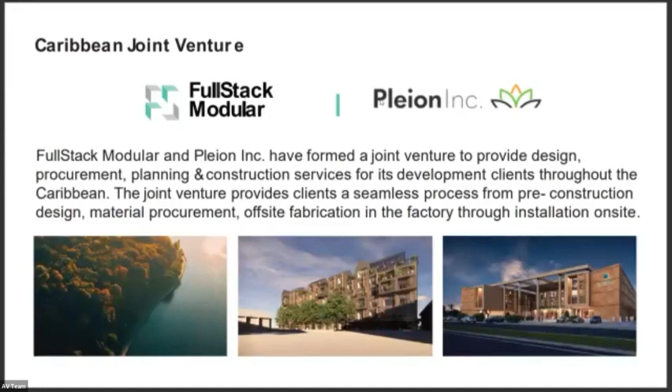We have not just a factory that does the same kind of construction that's done on site, but there are all kinds of technologies, including the technology that we developed at Tech Prefab, which we brought over to FullStack, that FullStack uses in order to enhance the design and the work that's done. There's a lot here, and I'll just point out one that to me was particularly interesting: we have a very high level of what we call dimensional accuracy.

But here I highlight some of the elements that are plaguing conventional construction. I mentioned affordability and housing shortages. There's a shortage of housing in the United States, and there's also a shortage of affordable housing. The numbers are in the millions. And when we think about the rest of the world, it's not just the US that suffers from that. So that's one thing that is demanding a change in the way construction happens.

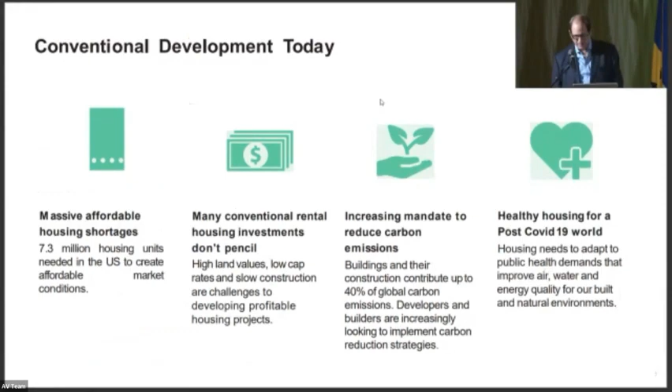What I want to talk about now—actually, I want to go back one slide. There is a slide that almost every modular or prefabricated company shows when they're trying to demonstrate some of the advantages of building in a factory.

So when you're building inside a factory, you can take advantage of the fact that you're not exposed to weather conditions. For example, building in the Northeast of the United States, we have long, cold winters, and that can cause significant delays. That's one advantage. The other advantage highlighted here in this, what I call the famous modular prefab slide, is the serial nature of conventional construction on site—when you're building on site, you can only do one thing at a time.

First, you have to prepare the foundation, and only then can you start building the building itself. That key difference between conventional and modular can save many months off a project. And as we all know, time is money. If you can save many months off a project, there are costs, whether they accrue based on financing, or if you're building something for rent or sale and you can finish 6 months earlier, that means you can start renting or selling it 6 months earlier. At a time when there are a lot of challenges in raising the capital, the equity and debt needed for construction projects, being more efficient in time and schedule has a very big effect on the overall viability of projects.

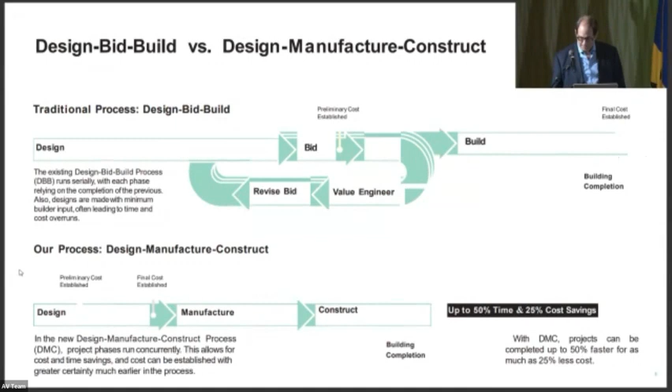I want to further talk about some of the additional advantages that we have. Again, it is a growing industry within the United States, although it's far behind Asia and Europe in terms of the percentage of construction that is built in factory as opposed to on site. It's changing rapidly, and there are a number of companies raising a lot of capital.

We've raised a lot of capital. There are other companies coming into the fore, but we've been doing it for a while, and it's really more on the business side, the finance side, and the project acquisition side. My partners are deeply experienced in building and construction, particularly in modular. There are all kinds of developments I'm going to get into within the way our system is designed that are proprietary and give us a big advantage relative to someone doing conventional construction who decides to open up a factory.

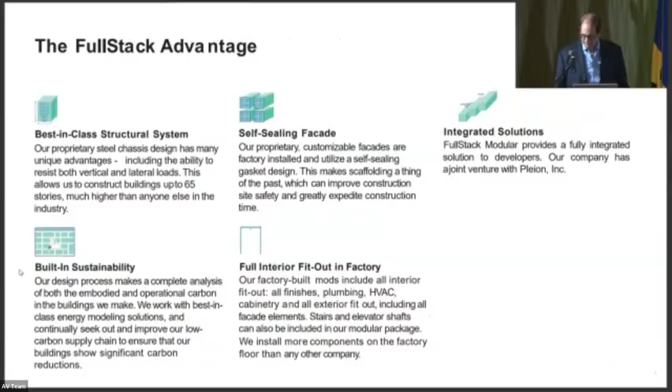We also have a factory in Portland, Oregon. We're working on some West Coast projects there. And one of the many reasons why I'm at this conference is we think that the next place for us to open up a factory would be in the Caribbean.

Here I go into a little bit more detail about the system that we use. If you go back to the example of building a car, on certain car websites like Tesla, there's one chassis that they built for the car, and then you can pick all kinds of options around that chassis. So that's kind of conceptually how FullStack has thought about modular construction. There's a proprietary system for chassis design, and there's flexibility within that, because not everyone is building the same cookie cutter building.

As I mentioned, some of the modules that we do have special circulation modules. There are kitchens, there are bathrooms. We're actually building now, we have a contract with Google. In New York City, Google has bought a lot of office real estate. We're actually building, this is a subcomponent, unisex bathroom modules for Google as a client, which is very interesting.

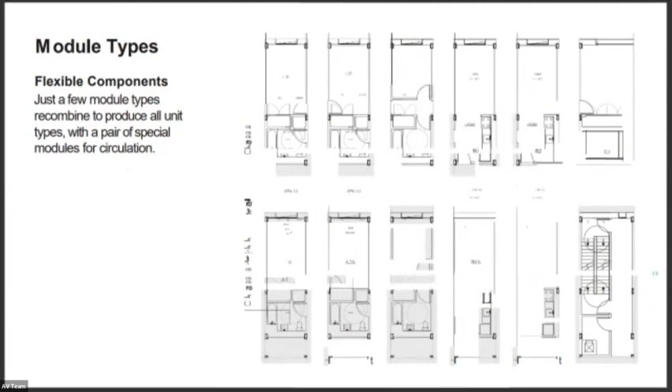Going back to the auto example, the way automobile manufacturing has become so systematized is by breaking everything down to its components. Sometimes the components are built in the same factory as the main factory, other times they're not. If you've ever seen a picture of a production line in an auto manufacturing facility, you see how there's the main chassis that moves along, and then people are either installing components or building components around it. So this is the whole kind of philosophy of thinking here.

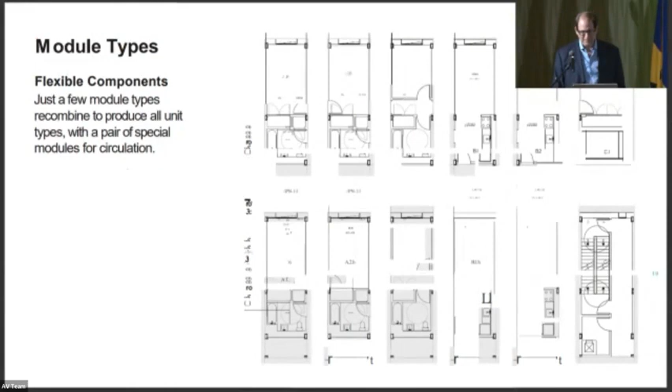So here, we show also that you're not constrained by the fact that your building is modular in terms of both the outer design and the interior design. Now, some of you may know about buildings made out of shipping containers that are not being used anymore. There are lots of containers, and there are aerial photos you can see of them, it looks like a cemetery of containers. So there's an industry where some people are doing that, and in some ways it's a brilliant idea, it's environmental, but what we're doing has nothing to do with that.

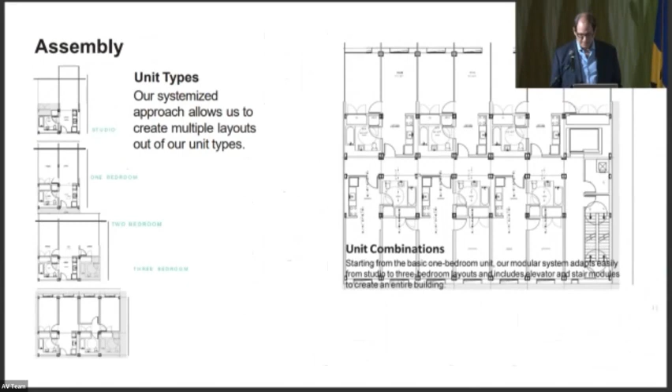The dimensions may look like containers because ultimately they have to be built efficiently in terms of transport, but we're not making anything out of containers, and we're not shipping anything in containers. They ship on their own without the need for containers. The whole idea here is to have sub-assemblies and to have components built, and the components can be specially installed in buildings of various designs, but things that are repeatable should be made in an easy way.

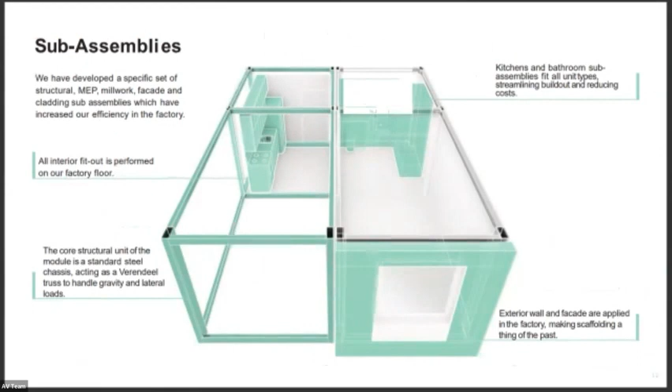I mean, think about just the concept of plug and play. So what we have, again, that's proprietary, is we've developed a set of cladding and facade assemblies which could be put on different types of building chassis. There's a lot more detail around it, but you get the idea.

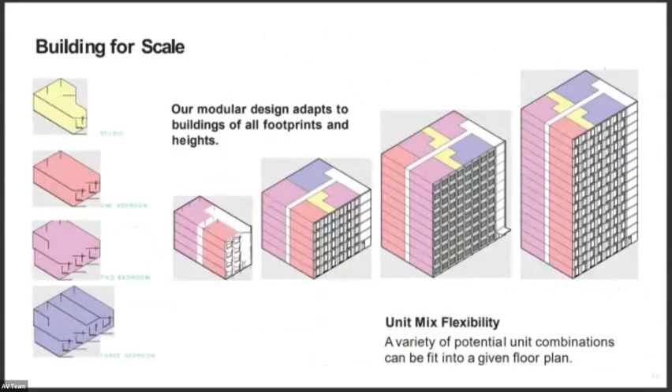Going back to sort of the outer framework of the building, if you're doing a massing study and trying to figure out what the best size and shape is, you should know that with modular, you're not constrained at all. There's a lot of creativity. We have a design for a round building, so you're not necessarily constrained by the fact that the main chassis is a rectangle. There's different elements, different ways to shape it, and a lot of customization within the idea that if you do mass customization, you can gain the efficiencies but still retain creativity around buildings so that not everything looks the same.

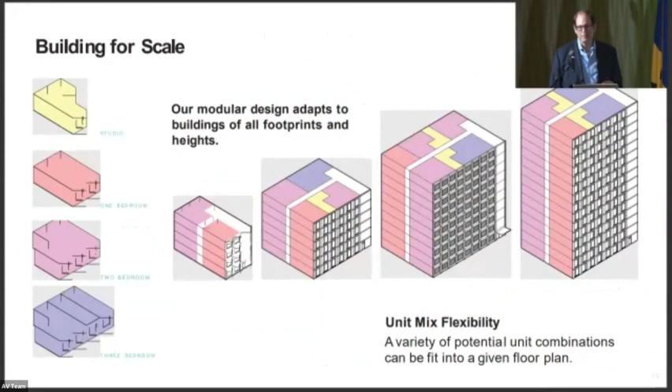On the other hand, if you're building, as I said at the outset, hospitality and multifamily, you do want to retain a certain cookie cutter element and have as much repeatable components as possible. But there's ways to do it so that the building doesn't look cookie cutter. That's something I want to emphasize because people sometimes assume differently about modular construction.

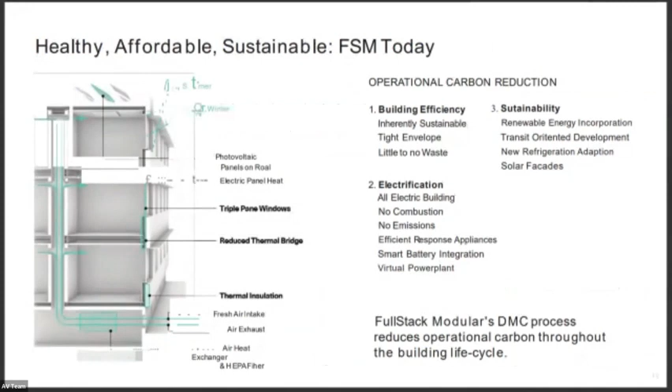When we talk about these issues of affordability, of health, of sustainability, they're all sometimes not connected to the details. And as we know, we have some men of the cloth here, God is in the details. And in real estate development, there are a lot of details.

Not to go through every one of these, but within the general system that we do to build modular construction, there is almost no waste. Now, I know waste is a good thing because you can take the waste and make money out of it, but what we do is try to be a little more preventative and try to prevent waste to begin with, at least in our system. So we will not be a source for Sweden, I think it was Sweden, of importing waste. We will try to do that as little as possible.

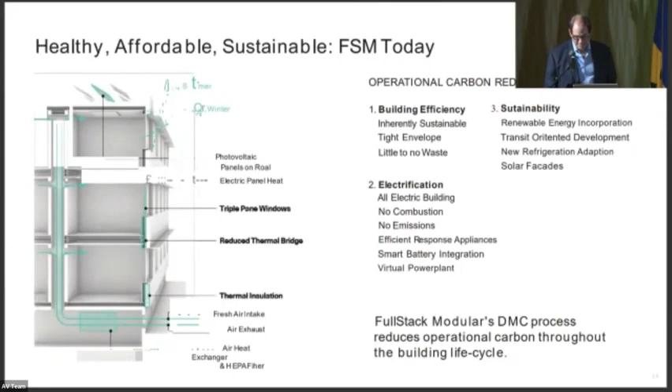There are other things within the construction that make it healthier. We sort of have this first slide, which I call today, and then we have some of the elements that will also add to these three factors: health and affordability, sustainability, that are in the pipeline that we're developing.

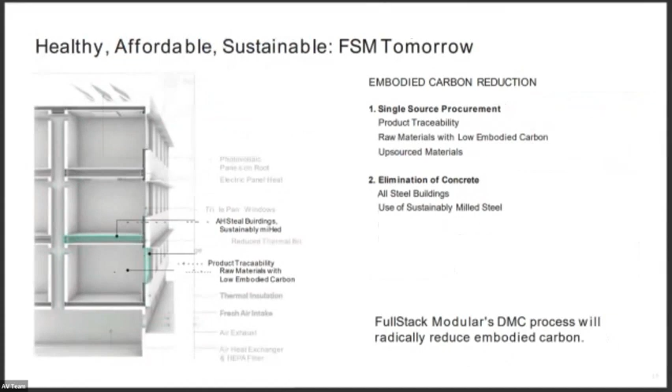So I want to show you a couple of examples of things that we've done and things that we're working on that can give people an idea of what could be done in the Caribbean that might inspire you to think about projects that have potential.

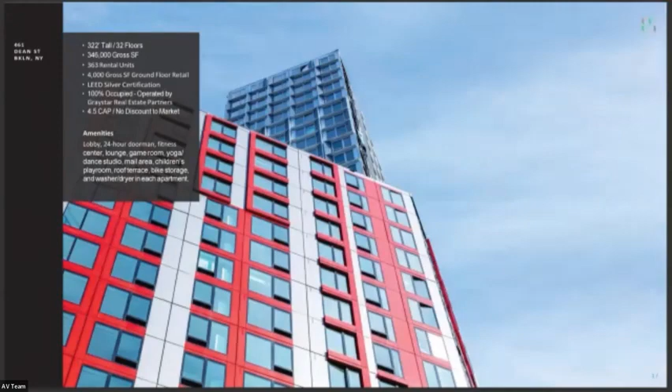So this is the first building that my partners built that got some attention because at the time that they built it in Brooklyn, New York, this was the tallest modular building in the world. It's right next to the Barclays Center, if any of you know Brooklyn, which is a big sports arena. Brooklyn Nets play there. And it's a 32-story building.

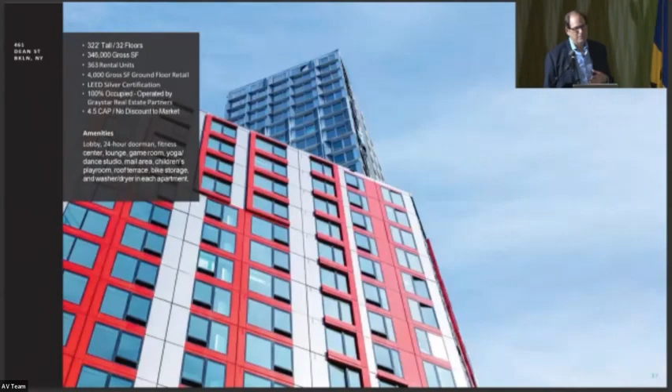You could see that there's some variation in the facade type and the color. The interiors are beautiful, I've walked it. It's lived in now. It's no longer the tallest building in the world. It's now the tallest modular building in North America because I think someone in Singapore built a bigger building. You know, things like that happen. The idea is not to be the tallest, but it's to be the most efficiently built and the most viable project.

But this one happens to be a proof that we can build in this world modularly and we can build tall. And the fact is that from an engineering, a structural engineering perspective, using our system, we can go as high as 65 floors. So hopefully we'll be seeing that one day in a market and location where it's warranted.

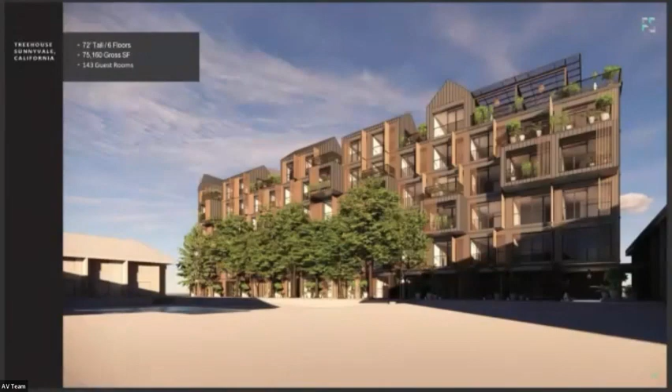The next slide is a building. It's a hotel, the Treehouse brand, which is owned by Starwood Capital, who's our client in this. This is in the planning phase right now, to be built right in the heart of Silicon Valley in Sunnyvale. This project is a 143 guest room hotel. We're building it out of Portland, naturally, from the West Coast facility.

And as you could see when you look at it, and as is true with any well-built modular construction, if you didn't know that it was modular, you wouldn't know, both from the interior and the exterior. There's a lot of flexibility, both in design, as I mentioned earlier, but in the cladding and the outer. If you want to make a building that looks like it's made out of wood or has wooden cladding, all of these things can be done.

And so the Treehouse brand, as you can gather from the name, is one that's environmental, sustainable, back to nature, has a green element to it. So this is the design. We're in a third stage now of design for them. We've just actually this morning I was talking to our CEO, and we got approvals from Starwood on kind of the basic procurement plan. So we're very excited about this one.

We think it's going to bring modular a lot more attention in the United States, which is part of us and even our competitors in the industry. We're trying to really make sure that people understand the benefits of it.

This is another project that's really interesting, one I've had a chance to tell some of you about. This is another hotel we're building out of the New York factory, but it's going to be shipped to Saudi Arabia, to a city called Al Ula, which is a UNESCO heritage site. I know you have one here because I passed it between the airport and the Hilton.

This hotel doesn't look obviously modular. It's a preliminary design, a bit earlier in planning and construction than the one I showed previously in California, but you get the sense that you don't need to be in country X to build a project for country Y. The group building this are very smart developers - this isn't an unlimited pot of gold someone is throwing money at. These are people who surveyed the possibilities of building on site and decided it makes a lot more sense to use our system.

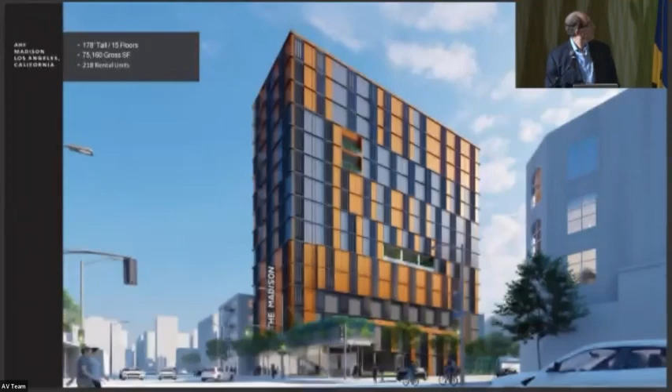So we're pretty excited about this project. Here's another project that's in the planning stage. You can see there's a lot of variation across all these projects when you look at them, and even within a single project there's variety.

Anyone can work with us to figure out and procure the best materials for each project. What makes a project good for modular isn't its outer look - it's not about what you're trying to achieve aesthetically, because we can do anything. It's more about what you're trying to achieve in terms of viability, and that's where we can be most helpful. In terms of the creativity of the building, you have just as much flexibility as you would building on site.

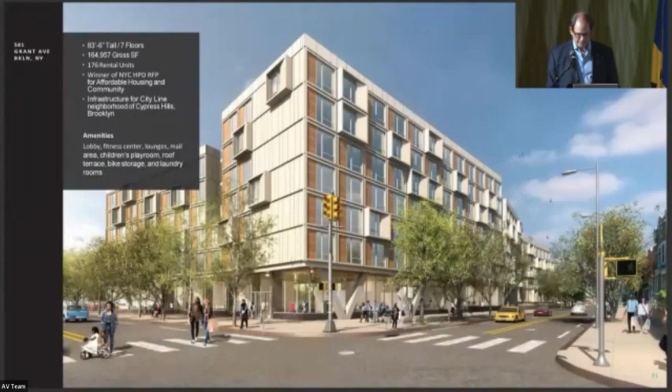It requires people who can't just learn on the job - it is very hard to learn on the job. One of the great things about the team we've assembled - I don't have the management page here, but almost all my colleagues specifically on the construction side have decades of experience in the industry, both on-site and in modular construction, from other projects we've worked on.

So in closing, what I'd say is that we're very interested, as mentioned before, not just in building projects here on behalf of groups in the Caribbean, but the idea of building a factory here means you can build at home, so to speak. You can train a whole new element of a workforce.

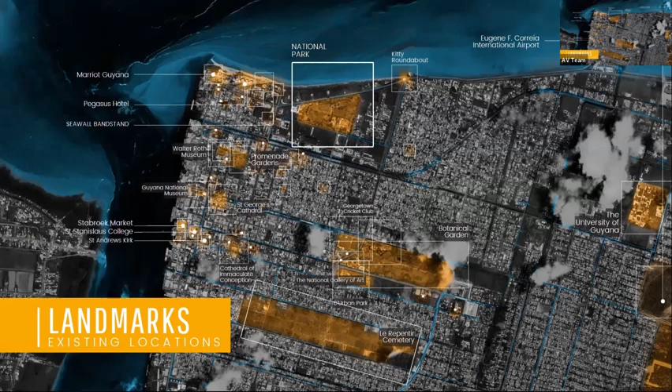There are existing canals that we have to connect, government buildings that we have to connect somehow, public services, private services, landmarks, whether they are gardens, museums, etc. They all have to be connected in a way that makes sense and that people can enjoy those spaces. We propose the creation of green corridors connecting all these landmarks.

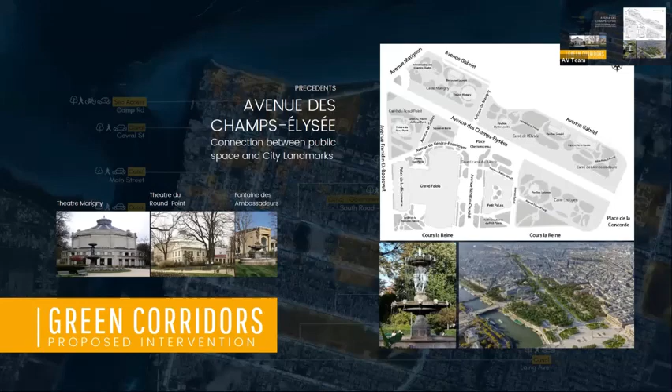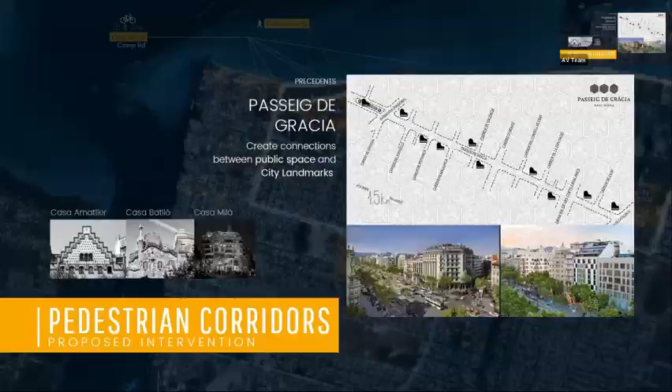We are proposing, similar to what we see in Champs-Elysees, for example, pedestrian corridors with walks that people can take advantage of, similar to Passeig de Gracia. We are looking into how we are going to do this. There are a few ideas we developed, and I'm going to show you a video where you can actually see what all these things are going to look like.

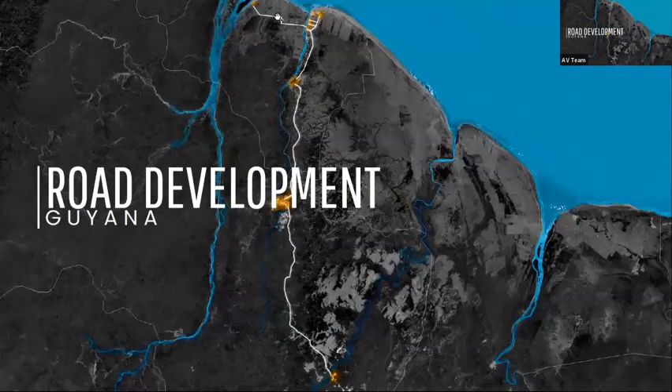There are a few cities I'm going to talk quickly about how they connect. Georgetown to Parika is a very important connection because there are a lot of ports in the future that are going to be located by Parika city. So this is a very important road right now that I think the government is looking into doing.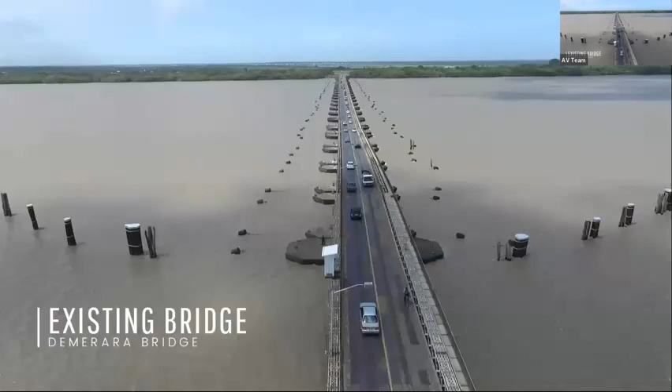The existing conditions and existing bridge are going to be replaced with a new one. And this will be the new bridge - it's the new Demerara Bridge.

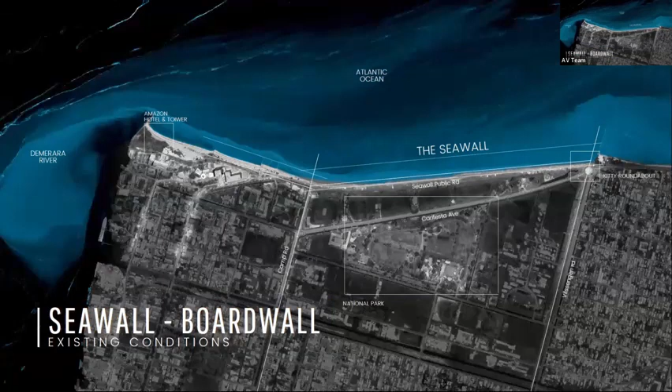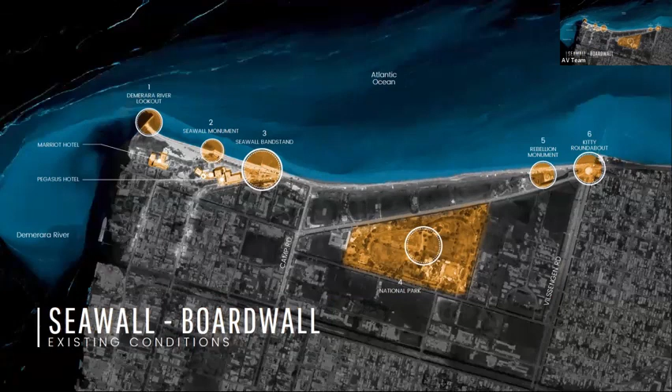Then you have the seawall. The seawall boardwalk is in existing conditions; it's about 1.5 miles in length. We divide it into two phases basically: phase one, which is the hotel and the marina, and the second phase is the commercial part of it.

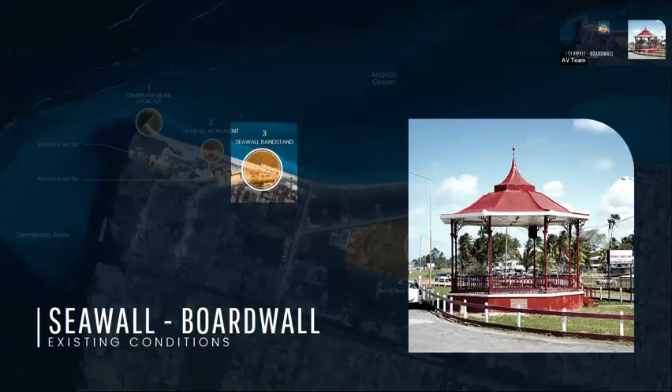On the right are the existing photos of the place of the boardwalk, showing a lot of landmarks along the boardwalk.

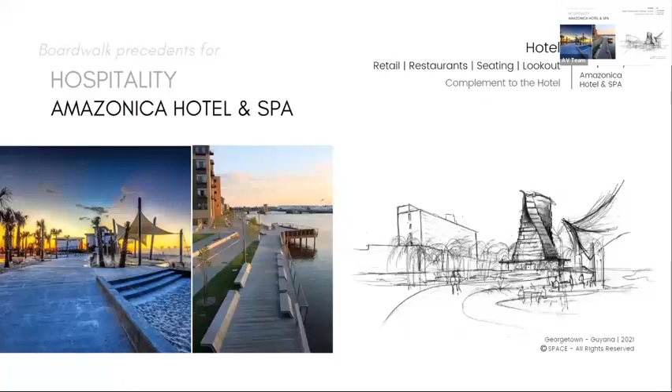This will be the first phase. We are basically connecting, and we are doing a marina, a hotel, and a convention center on this area. It's about 0.5 miles in length. Then you have the Amazonica Hotel - some photos of what it's going to look like. And then you have the marina and the convention center.

Along the boardwalk, we are going to have all the restaurants and shops that people can actually enjoy while they are walking through. There are some views of the space.

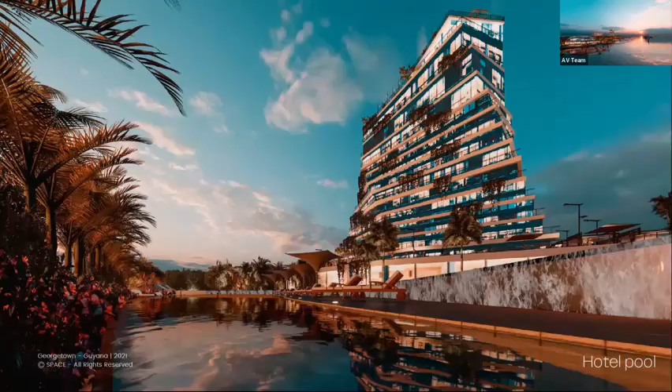Then we have the second part of this boardwalk, which is from the pool all the way up. All these are empty lots right now that are going to be developed. We are proposing that the second phase will be from this point on. It's about a mile in length, and it needs to be developed as a boardwalk. It is important now because local people meet there, and I think once this is developed, it's going to be the gate of Guyana, or Georgetown. I think that's the importance of this area.

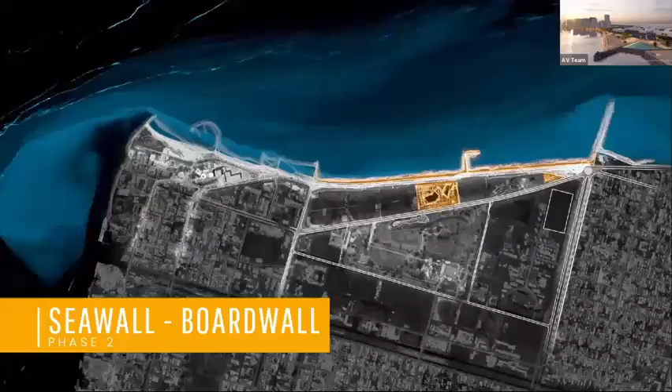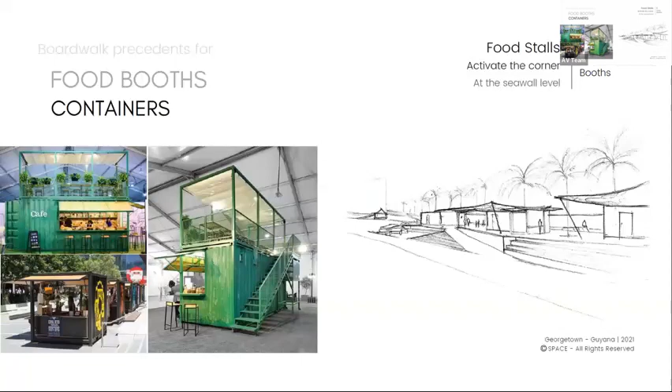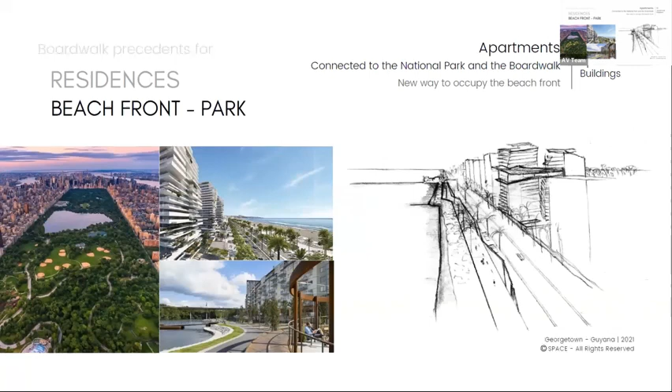Some ideas of what is going to go there, for example food. I think it's important for people who arrive in Guyana to understand the culture through food, sports - what kind of sports is practiced there - and all the culture that comes with it, right? This is one of the residential buildings that we are proposing on this area.

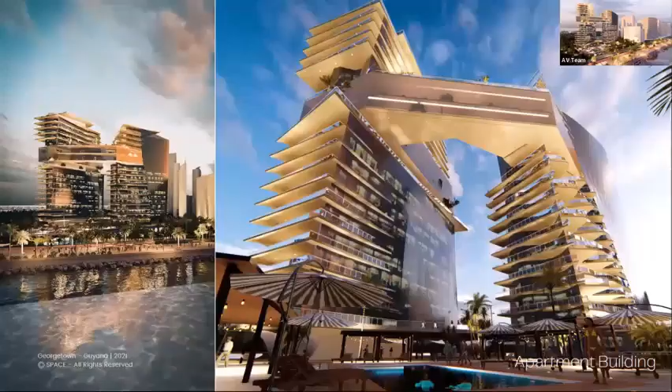I think that's basically a quick view of what we are proposing for this part of the project. I'm going to share with you a video that will give you a better understanding of what I just talked about. I don't know if Rafael, at the end of the video, wants to add things to my presentation, but let me stop this presentation and share the video.